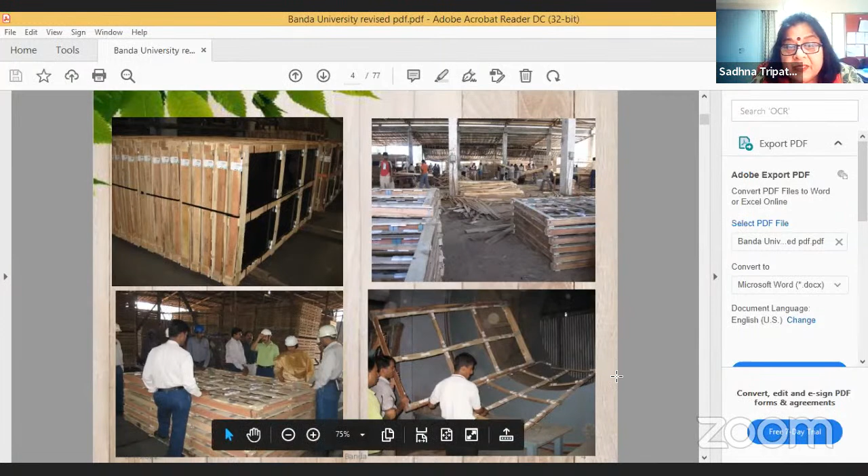And these pallets had different sorts of problems at that time when it was established. A combination of wood was being used, so we tried to resolve the issues, and it was successful. So that sort of consultancy we are imparting in the field. We are in the export industry also, where the goods are being made and they are facing problems. We are regularly in touch with the industry to resolve the issues.

And this is another major industry, which is cooling tower. It is basically used for the petroleum industry. You can see in the petroleum industry, refineries, coal industries, you'll have the cooling towers there. It gives the cooling effect to the assembly. There's a huge consumption of wood in the industry. It's a very cumbersome sort of mechanism to deal with.

And we are also imparting consultancies to very big clients like Reliance, NTPC, Birla, fertilizer companies. There are so many. So we are also dealing with the type of material which is being used. There was a problem in the industry that a combination of wood was being used at that time, and a few imported timbers were also being used. So a lot of collapse was there. When the collapse is there, the production is stopped, and there are huge losses.

So we have been invited for the last 6, 7, 10 years to the industries, and we resolve their issues, and now it is all well. Since you are forestry students, no need to tell you what the structure of the wood is; it is very basic. You can have a look. In the center, you will have a pith, followed by the heartwood and the sapwood and the bark.

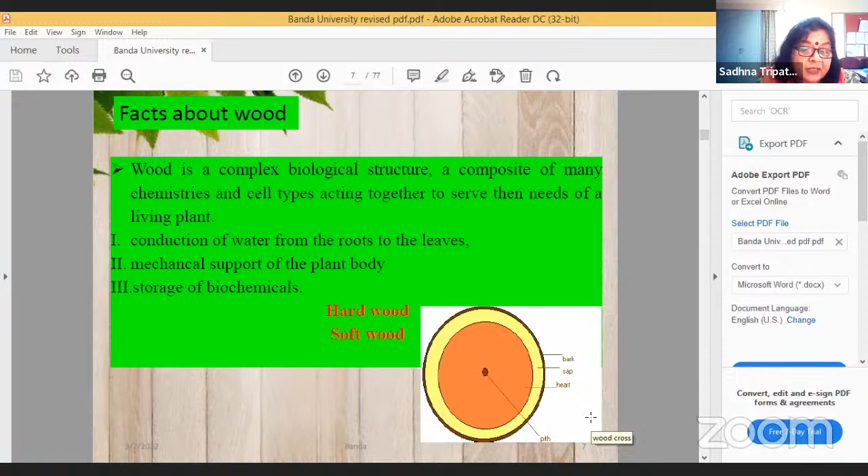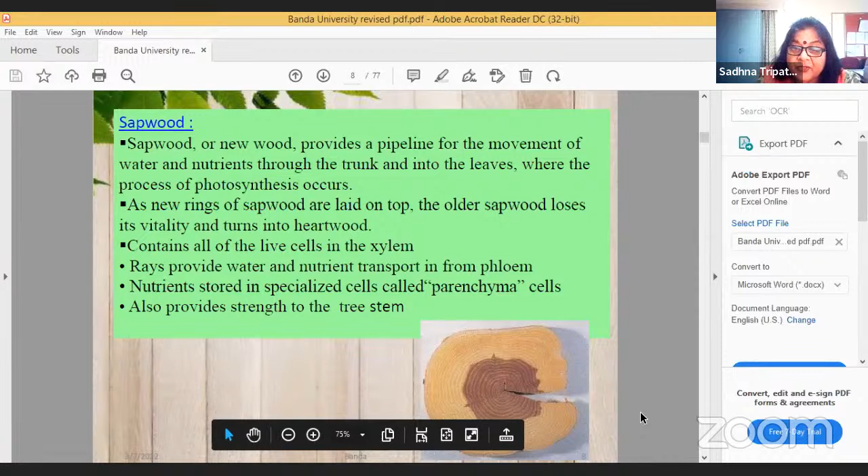So first of all, we have to focus on the cross cut of the log, what is the age of that, what is the expected age of that material. Next, this is all sapwood. Since you are all already at the assistant professor, associate professor level, I need not tell you what this is. You can have the idea of the heartwood, followed by the sapwood and the bark.

Now, a little bit I would like to explain here. The more the heartwood, the more the durability is expected. It is because durability is always related to the heartwood, because all sorts of byproducts, or the secondary metabolites which are produced during the growth of the plant, get accumulated in the heartwood. And most of the byproducts provide durability to the material.

Like alkaloids are there, terpenes are there, terpenoids are there, phenols are there. They are all known for their durability, and they get accumulated in the heartwood. More the heartwood, more the durability. Whereas in the sapwood, there is more of the cellulose part, the carbohydrate, or the sugar containing compounds. So the more the cellulosic part and sugar containing compounds, the more will be the attack on the sapwood.

So now whenever we go for preservation, we focus on the sapwood, because we assume that heartwood is already durable. But in that case also, the durability may differ. It may be of durability class 1, 2, 3, and so on. You can refer to Bureau of Indian Standard 401. Just go through that. You'll find that different durability classes are there. These durability classes are made on the durability of the heartwood only.

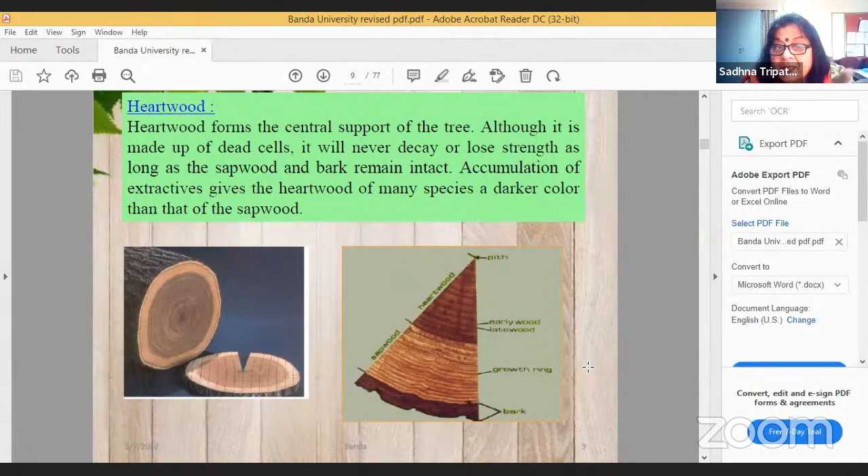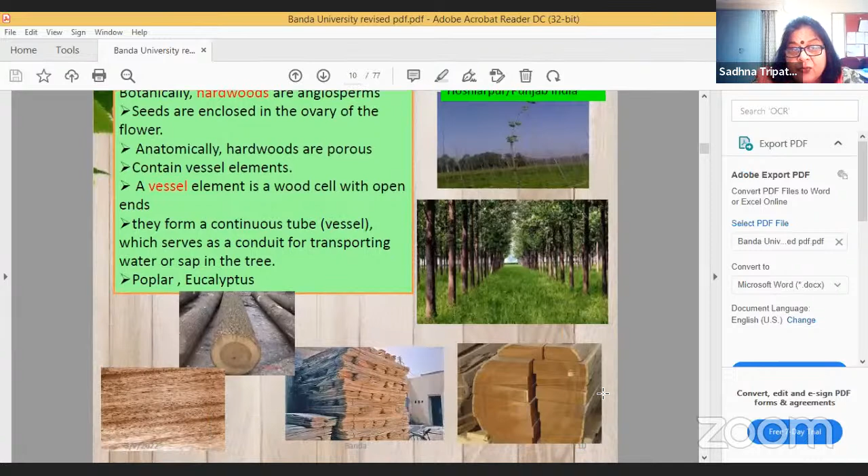And we gradually take observations up to 10 years. If nothing happens to that material, then it comes into durability class 1. I'll explain further. But by and large, if it is not attacked for 10 years, then it is durable. You must have the idea of the hardwood, why it is hardwood, what is softwood. Here the pines all come in the softwoods.

And what is natural durability? As the term indicates, it is the durability naturally present in any material. How is it there? Because of the extractives. As I have told, these are the secondary metabolites produced in the plant, and many of them have protective power. They provide protection to the material. So it is termed natural durability. It varies with age and height, and from tree to tree.

And now this is the durability class which I was just explaining: if the material gives a service life in exterior ground contact of 10 years or over, then it is durable. Need not worry about that. No treatment is required. Majorly, the species are sal, teak, shisham, etc.

But as we move to the lower classes, if we put the material in the ground and get a life between 60 to 120 months, it comes into moderately durable; 55 species were so far evaluated, now the number has increased. If it vanishes within 60 months, it comes under non-durable. If we have material in the lower two classes, we have to do the preservation. There is no option. But if we have durable species, nothing to worry. What happens is, we straightforwardly say that yes, this is teak, it will be durable.

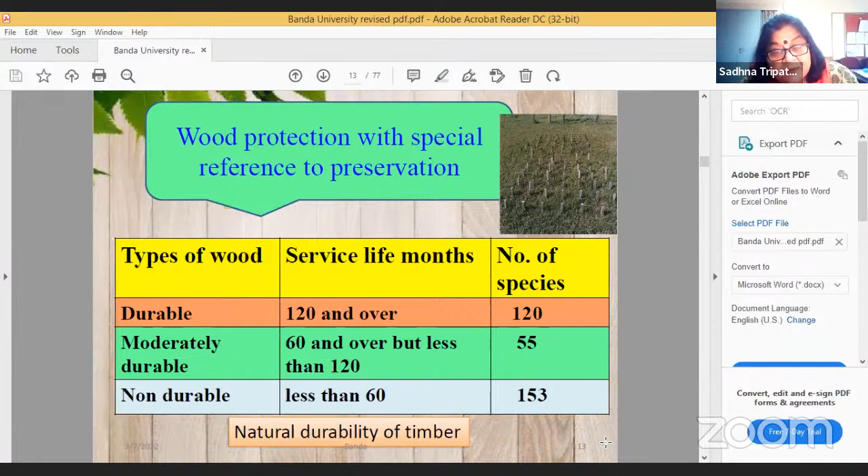What is preservation? Preservation is an efficient tool to prevent biological attack on the wood. As I've said, we have two larger portions: one is sapwood, one is heartwood. Heartwood has different durability classes, but sapwood is always non-durable. So if the material has a larger quantity of sapwood, you have to do the preservation.

Sometimes people ask how to segregate the material when we have 50-50 heartwood and sapwood. How to convert the material is a big task. If you convert the material as a whole into planks, when you go for treatment you won't be able to treat the heartwood, only the sapwood. But the plant manager will ask for the whole money; for the volume he will charge double, and you are paying for that.

So you have to be a little bit aware and have some technology for how to segregate the material. You have to cut your planks so that you get the maximum quantity of sapwood and both woods are separated properly. That sort of technique needs to be developed. Since you are from the forestry and wood science and technology background, you have a lot of knowledge in the field.

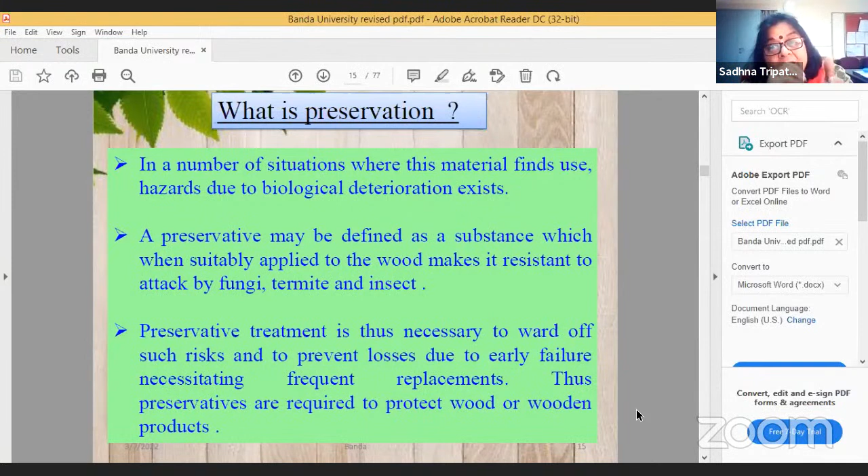And it has a sort of binding material. It has a tendency to bind with the cellulosic part, so it is there for a longer duration. What we do is that we take the material and, by some mechanism, we impregnate the material with the toxic element, and it is there. When you introduce some toxic material in any material, it will be durable. It will provide the protection.

Now, what are the basic agencies which are responsible for decay? These are biological degradation. Fungi are there, then insects are there. We deal with the fungus and the insects. They are the type white rot, brown rot. You have to worry about both the rotters, because they basically decay the wood. They affect the strength of the wood.

Whereas the sap stain causes the stain on the wood, which deteriorates the quality of the material, the looks of the material. Soft rot, again, affects the strength. But white and brown rot are the major players which exist in the normal environment, whereas soft rot exists in the humid environment, basically in humid areas, or in the cooling towers and all. But white rot, brown rot, you can get it in your houses, you can get it in exterior conditions

in your yards and all. And the termites are very dangerous, and there are many types. We are not focusing on that, but basically they are also responsible. First the attack takes place by the rotters. They form a spongy type of material. After that, the termite enters into the galleries and consumes the rest of the material. So it is all gone, and on the surface you won't be able to see that it is damaged. But inside, everything is gone.

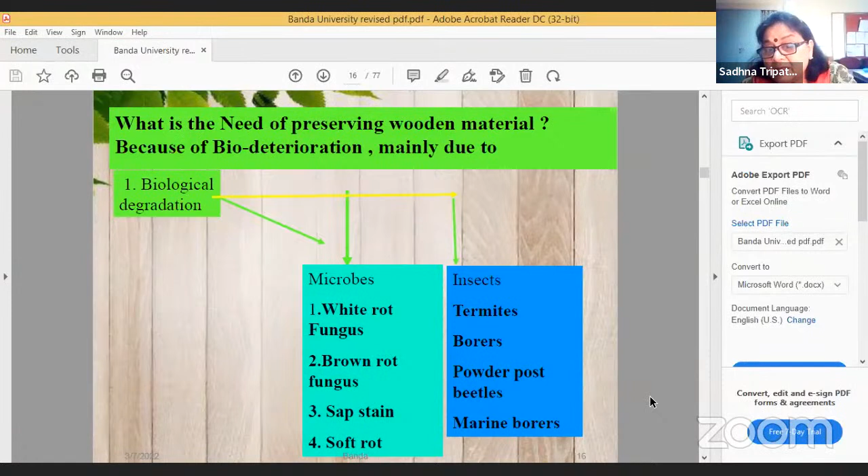But if you have gone for the preservation, what would happen? Since it is a toxic material, it will just kill the borers there itself. So if the material has the borers and you have properly treated the material, you won't get any sort of defects further. Now other effects, which are physical, chemical, mechanical, and fire. I am not dealing with the others except the fire one.

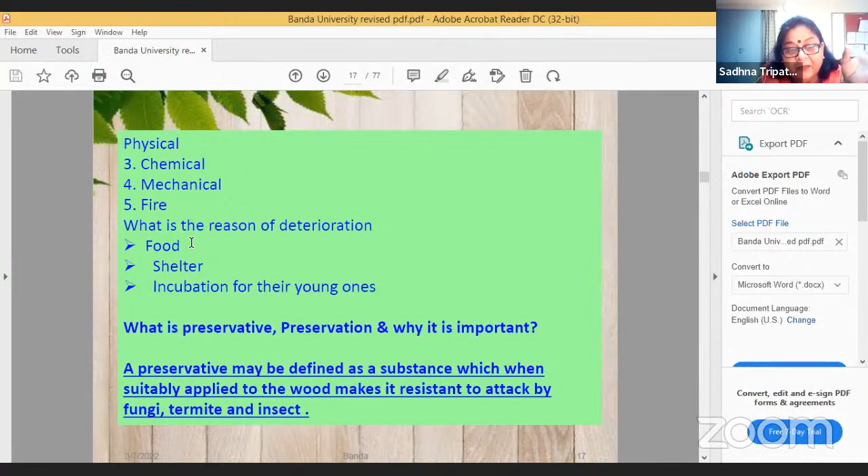So what is the reason for the deterioration? Very simple: food, shelter, and incubation for their young ones. Food is the basic requirement of any decaying agency, be it fungus or termite, along with shelter and incubation. And a preservative is defined as a combination of toxic materials which, when suitably applied in a suitable quantity in a suitable material, gives protection. That is the simple thing. What is suitable, I will explain further.

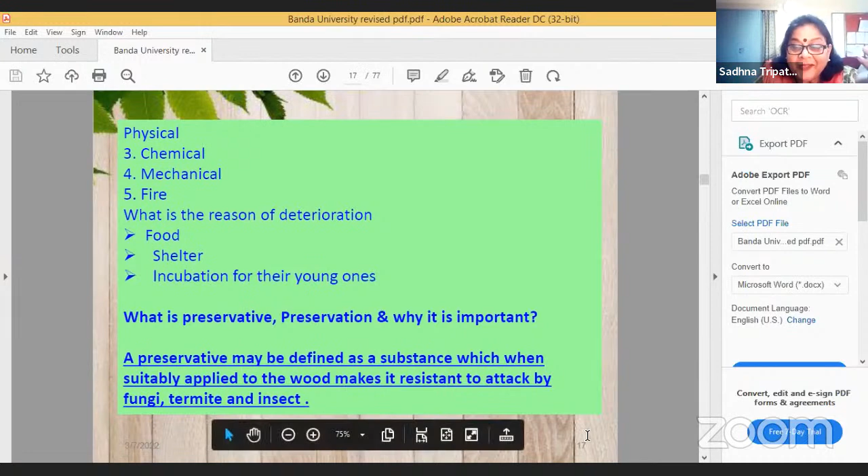10 kg per cubic meter is the maximum quantity required for protection of wood. For simple calculation, you multiply 150 with 10 kg, that gives 1,500 a cubic meter - that's the investment only. Apart from that, the vessel has to run for 2.5 hours, so with electricity and manpower it comes around 3,000 rupees per cubic meter.

A cubic meter is a large volume of timber. So you are investing 3,000 rupees in a cubic meter of material, and you are getting several fold life of that material. That is a simple calculation here.

If you see that the mine has untreated material, mine props have a life of 2 years - you might have heard about this. But if you treat the material, you get 10 years of life, so simply the life increases 5 times. When using material in open ground, 5 years becomes 25 years.

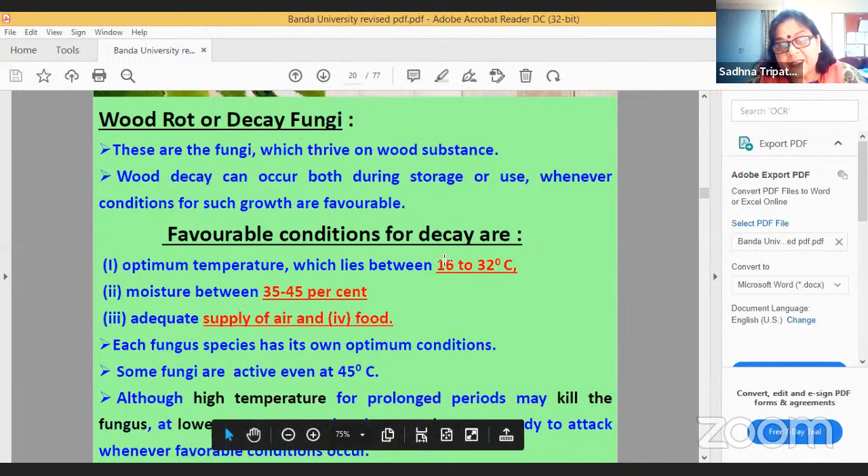The favorable conditions for decay are 16 to 32 degrees centigrade, 35 to 45% moisture, and supply of air and food. If these conditions are there, certainly there will be attack.

You might have seen this sort of thing, white rot fungus, where cellulose, hemicellulose, and lignin are all attacked. That means all the integrity of the material is lost. So white rot is very, very damaging.

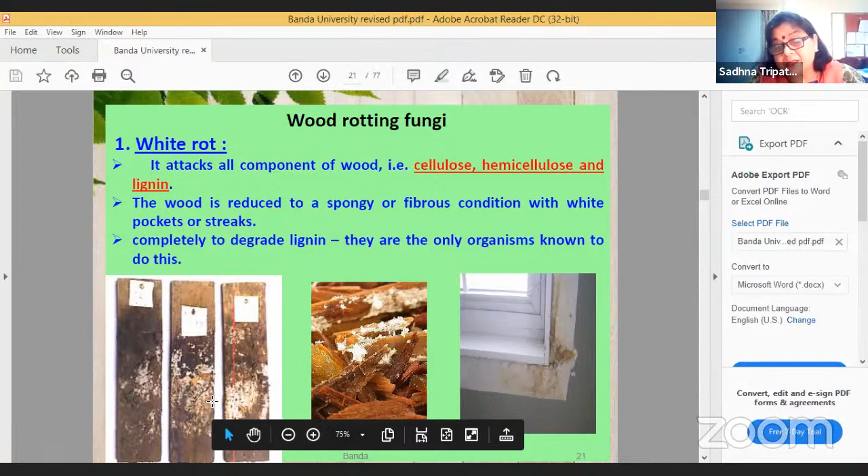Whenever you see that the material has a cottony white growth, you segregate the material immediately, because this fungus grows very fast. Similarly, you might have seen the cuboidal sort of thing.

It is brown rot, and these rotters primarily consume carbohydrates. Lignin is not much affected, so in this case the lignin is left as such, and the material becomes brown in color.

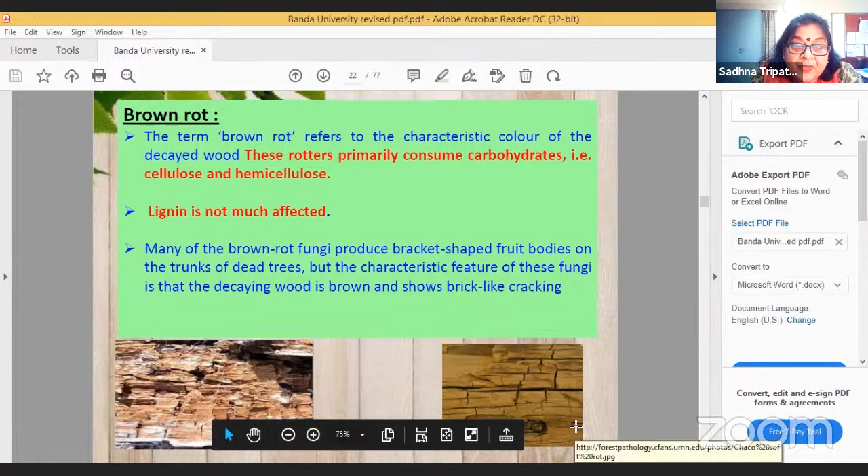It also affects the material. This is soft rot. I have already told that in the cooling tower, you'll be able to find decay marks on the material - that is soft rot. It is very, very aggressive, as soon as it infests the material, all the material becomes spongy and loses all its strength.

So what is the method? First is just to keep the wood dry, coat wood with things like borax, boric acid, sodium pentachlorophenate to poison the wood, using natural and artificial methods. We'll discuss this further.

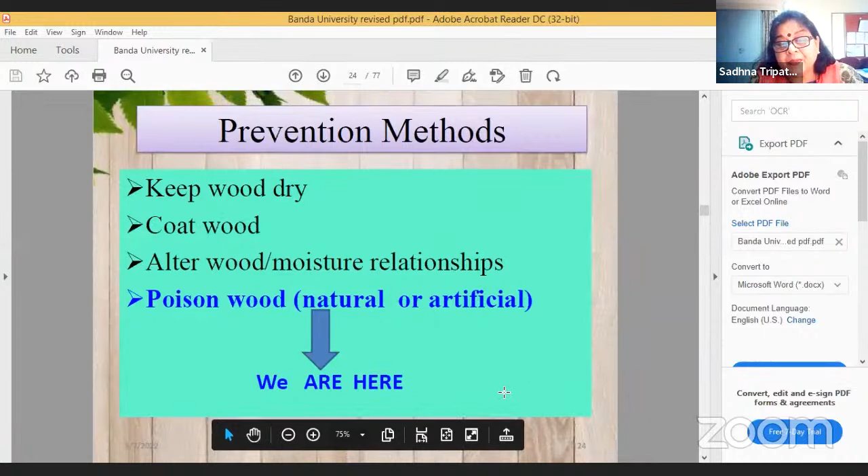So it starts with non-felling - if the fell timber is there, we have non-chemical methods and chemical methods. There are two types of methods.

First is, what happens if we cut the timber in the winter season, what would happen? May I have interaction with the audience also?

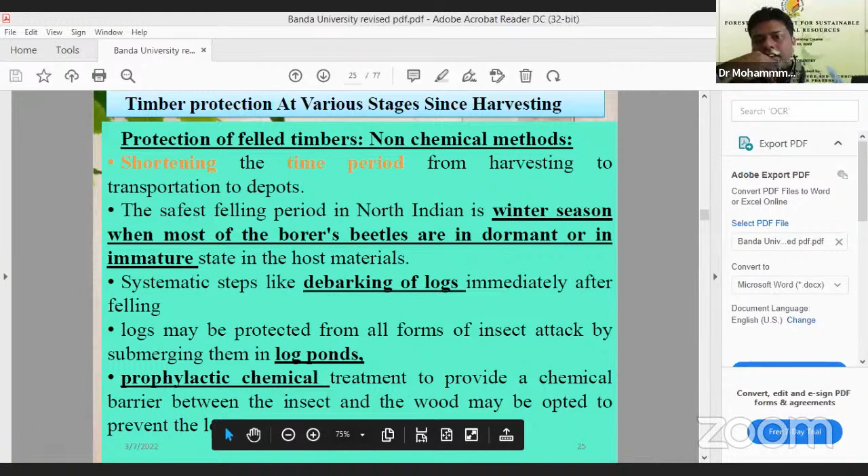One more question I think I should ask here, and then we can move ahead. What is exactly found in the indigenous teak that makes it durable? Indigenous thing, what I have seen, like in neem oil - every natural material has a different entity. Like in neem oil, hundreds of compounds are there.

He has asked about teak, ma'am. What is exactly found in the indigenous teak? He has asked about lantana. No, actually in the personal message he sent a DM. His question is, in teak, tectoquinone is present, and that is a ketone. Tectoquinone, okay, yeah, tectoquinone is there. It is in the literature also.

And that's a ketone which provides protection - there are 3-4 compounds. Majorly there are 3-4 terpenes, terpenoids, alkaloids, phenols, sulfur compounds. They majorly play a part in protection.

So when we are going for timber felling, we have to take care. If we can manage it in the winter season, then it is good, because all the physiological activities are at the lower side. So it is in the dormant state - winter season, when most of the borer beetles are in the dormant or immature state, then you can plan felling.

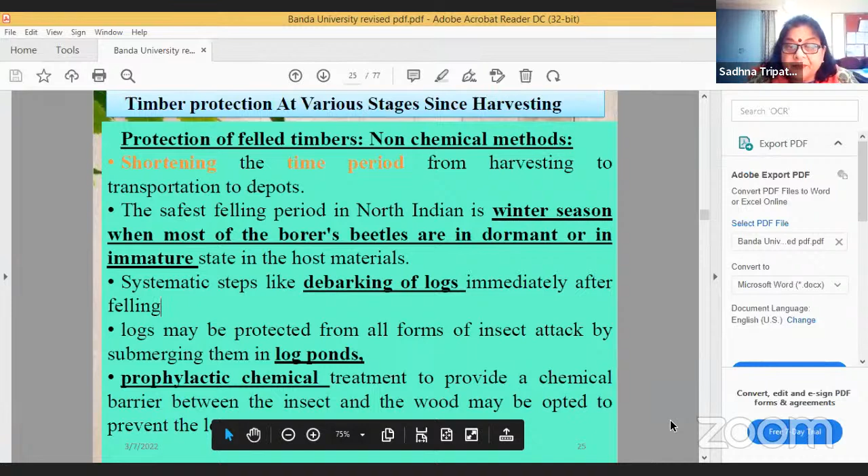Now, protection against end cracking. You might have seen that when logs are there, after some time cracks appear on the ends of the logs. What happens is that there is uneven removal of moisture - from the ends it is very fast removal of moisture, but from the upper surface of the log there is a slow removal. Yes, Dr. Amarjeet Singh, unmute yourself.

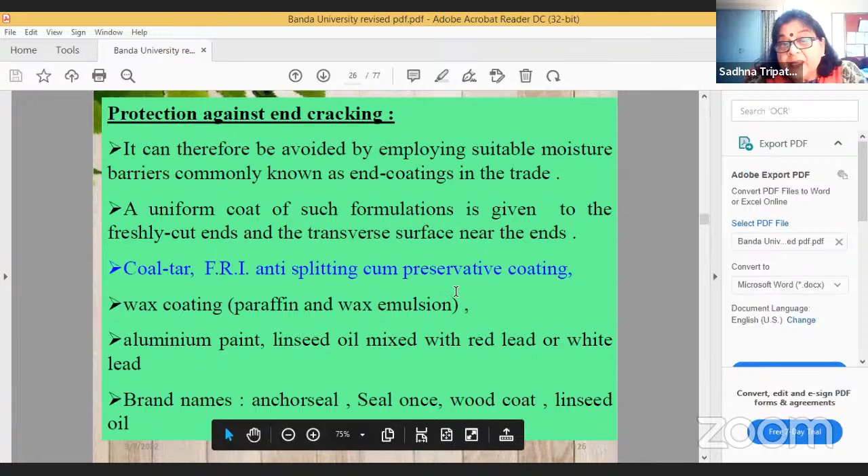So you can see the uneven drying will result in end cracking of the logs. So prophylactic treatment I have already explained. When you have converted the material, but you are not able to use it further for processing, if the kiln is not available, or your material is not properly dried, or some sort of problem is there, all these materials are available in the market.

You can have anyone. I prefer the borax boric acid, sodium pentachlorophenate, 2.5% solution. Spray it, apply the crosses, stack it there for 3 months. Need not worry. This is called prophylactic. Prophylactic means initial remedial treatment. So now there are two different types of protection also, like short-term protection during transportation and storage, and then long-term protection.

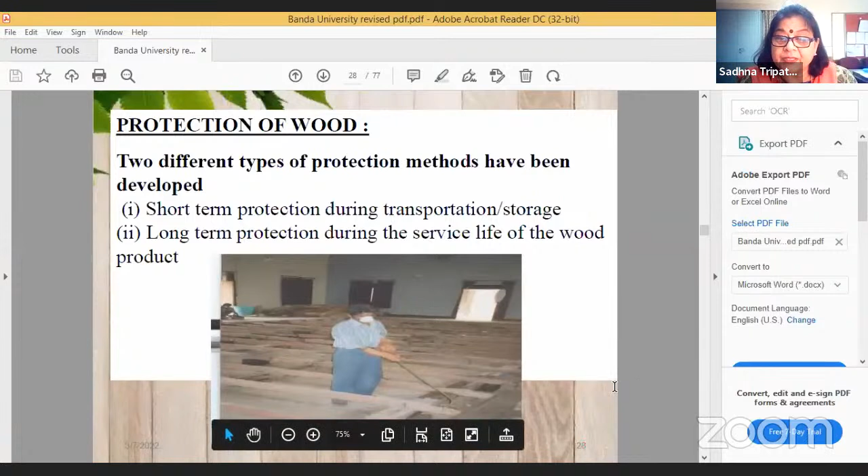These are the chemicals which are basically being used in the industry. One is oil type, then the organic solvent type, and the waterborne type. We'll come to the oil type preservative. This is called creosote coal tar fuel oil. It is a byproduct of the coal industry, which is very, very cheap. It is available in Ascu, Hickson, Calcutta. They are providing it in drums. Earlier, it was 11 rupees a liter. Now it may be 30 or 35 rupees.

And the fuel oil, you can get it from the oil refineries. 50-50 solution is there. Cold and hot treatment is given, and the wood material lasts for more than 100 years, what we have seen. In FRI, we have the building of the FRI here, where the roof is made of pine shingles. These pine shingles are treated with the same procedure along with the CCA. So for more than 100 years, it is there. So now you can imagine how useful it is.

It is being used for catamarans, for ships and all. And in the yards also you can use it. And it's very easy also. For your own purposes also, if you are making your house, you can get the residue from the petrol pump. You take the residue, dissolve it in kerosene and just spray on the soil. And after that, you build the house. It's my personal experience. There will not be any termite infestation from the plinth. So that is how effective it is.

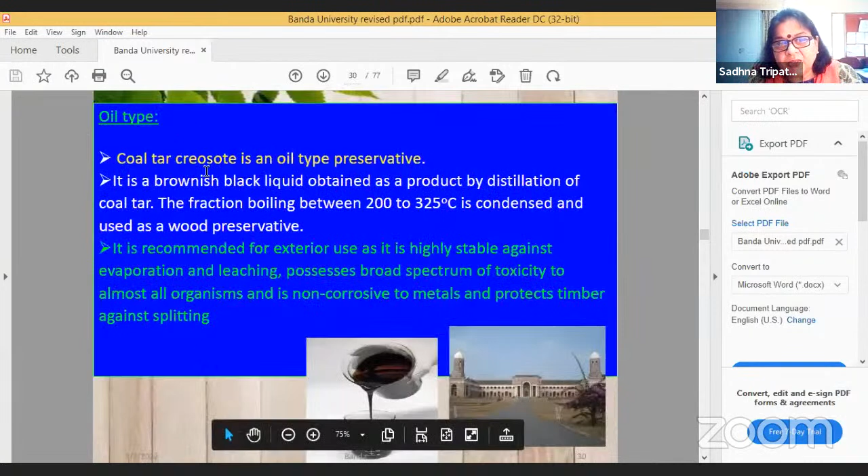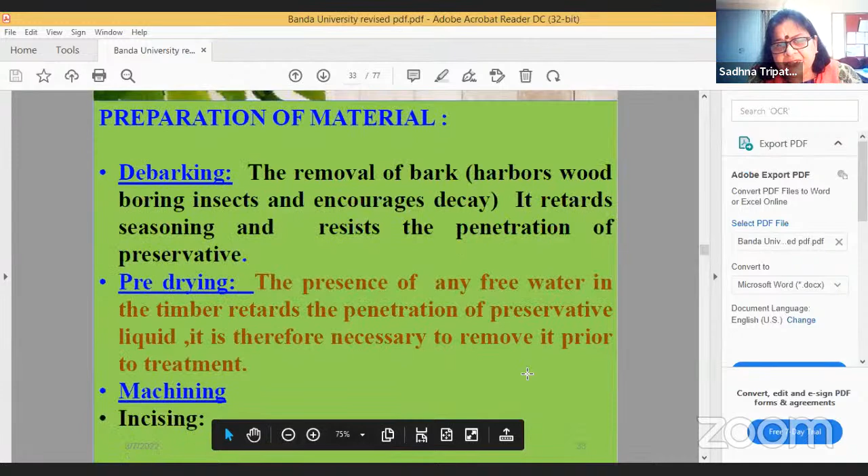Now, this is coal tar. I have already told, this is a byproduct of the coal industry. Fixed type, I have already explained. These are the conventional type, CCA, CCB. These are the steps: debarking, pre-drying, machining. These are the processes. Then I would go for the long-term preservation. Long-term preservation, this is debarking. Then we put the material in, and different types of machines are there. There is a hot and cold process, which is suitable for the coal tar sort of treatments.

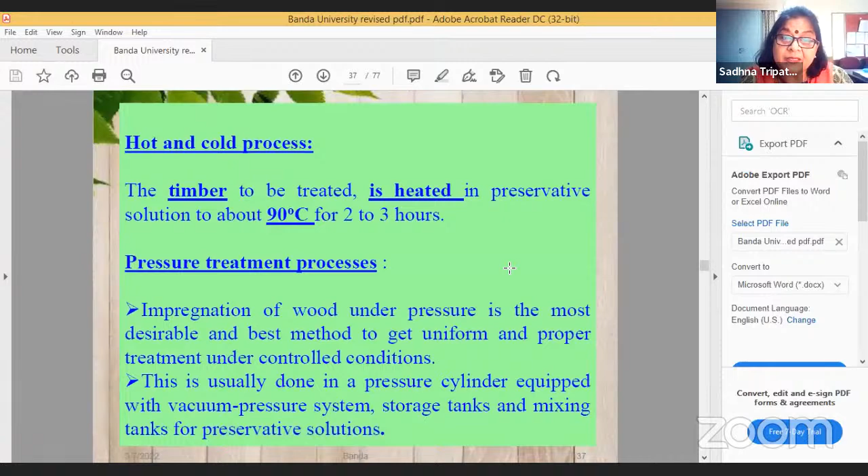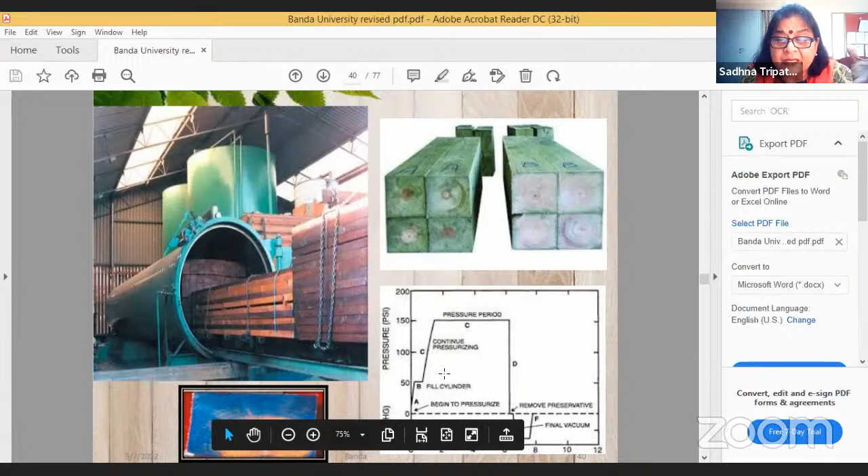Then the pressure treatment processes. In case of the pressure treatment process, we have different techniques. Now you can see that we season the material, we stack it properly, and these are the treatment vessels. These are the tanks where the preservative is stored. We introduce the material, we close the lid, and then a small vacuum is given. On the graph, you can see a small vacuum is given. The free air that is there will be removed, and there is a vacuum in the cylinder.

With this, the pressure is given, and with the pressure, the liquid is flooded in the vessel, and this pressure is maintained for a certain period. The pressure amount and the duration depend on the type of the material. Like what? If you take chir, Pinus roxburghii, or any soft species, not imported. Imported are very complicated. Indigenous softwood, if you take it, a small pressure has to be given. The maximum is 10 kg per centimeter square, and the minimum is 3. So 3 kg is enough. For half an hour, pressure is maintained.

But if you have eucalyptus, then vacuum, then high pressure, and the pressure has to be maintained for a longer period, then leave the material in the vessel along with the preservative. So that sort of technologies you have to develop. It varies with the wood material. If the wood is easy to treat, then an easy method is applied. Otherwise, you have to devise the method, but the basic crux of the treatment is this: a small vacuum, then pressure, then vacuum.

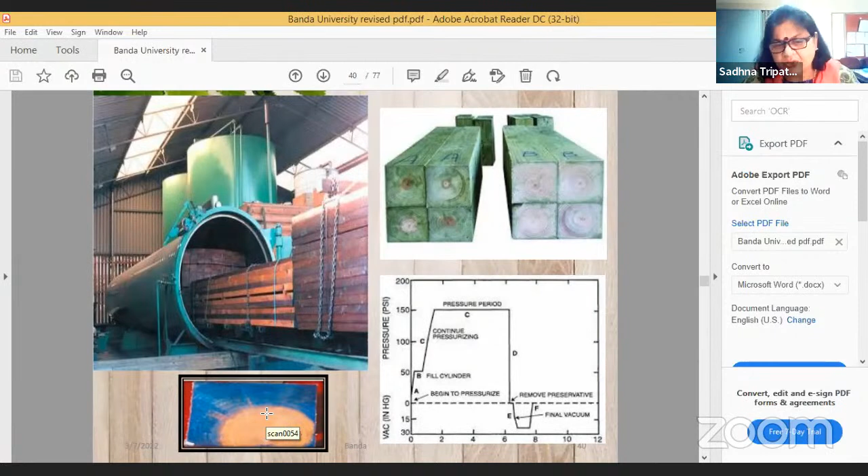If the material is untreated, what would happen? You will get this. You can see that this material is completely treated, whereas this is untreated. So it will cause the failure of the wood in the system or wherever you have installed it. So we have to avoid this. Through and through treatment is required for any end use.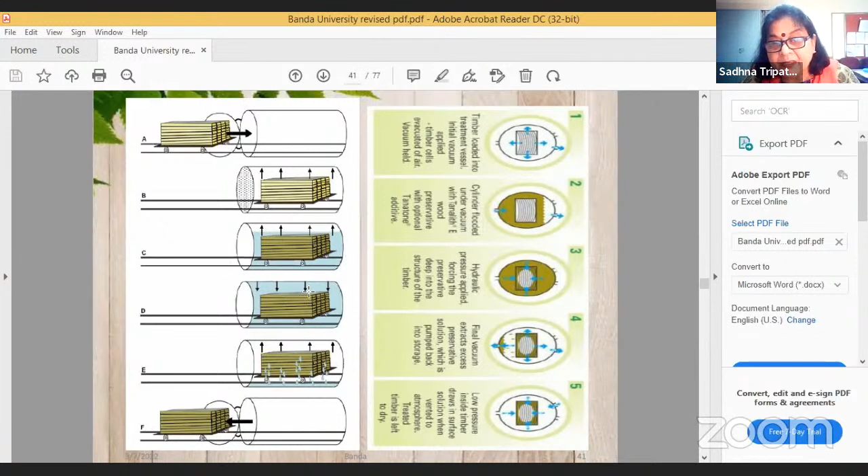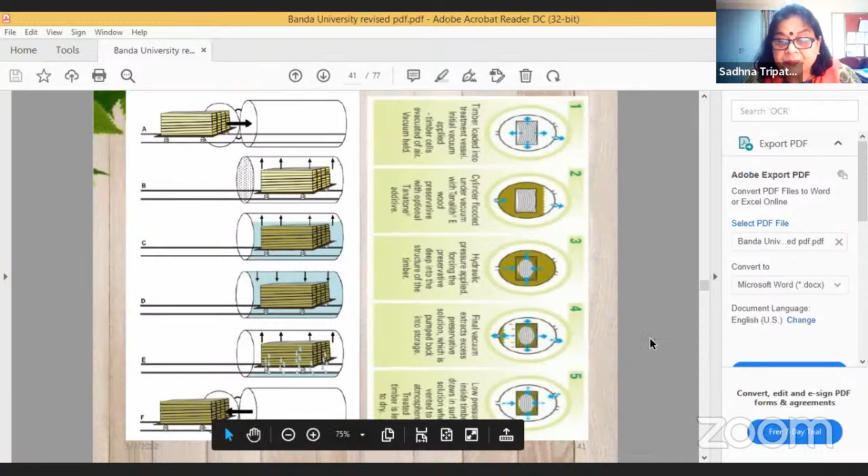This is a simple representation. Material is in the vessel. A small vacuum is given. Then the machine is flooded with the preservative. Then pressure is given. The material is treated for a certain period. And then a small vacuum is given, and then the material is out. So that is the simple technique. Very simple. This is the graphical representation.

We observe these samples for 2 consecutive years. In the first year, we place it in May, remove it in November, and study. Then again in the next season, we place it in May, remove it in November, and we study. This certain concentration is there for plywood also, and for solid wood the same method is there; it is all published. So only if the material performs like that do we say that yes, this preservative at this concentration is working on the plywood or on the solid wood.

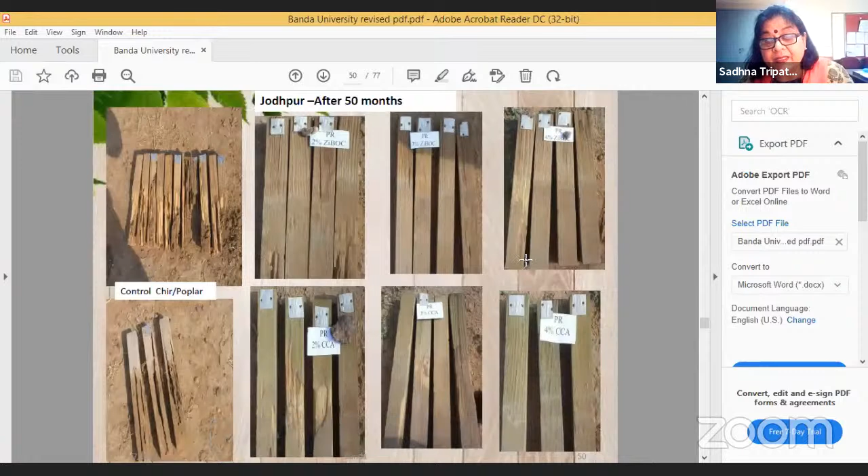We have different test yards. One is in Dehradun, one is in Chakrata, one is in Jodhpur. So by and large all climatic conditions are covered. We take the observations simultaneously at 3 centers, and on a cumulative basis we give the result that yes, this wood and this preservative is working. This is a yard. This is imported timber. This is chir and poplar.

You can see the outdoor testing is now already in the standard. Earlier it was not there in our standard, but we have now standardized it. Now you can see this is imported timber. You see the infestation at Jodhpur. How aggressive is the termite? The whole of the wood is covered with termite soil. This is yellow Meranti, which is imported timber, Shorea group of species.

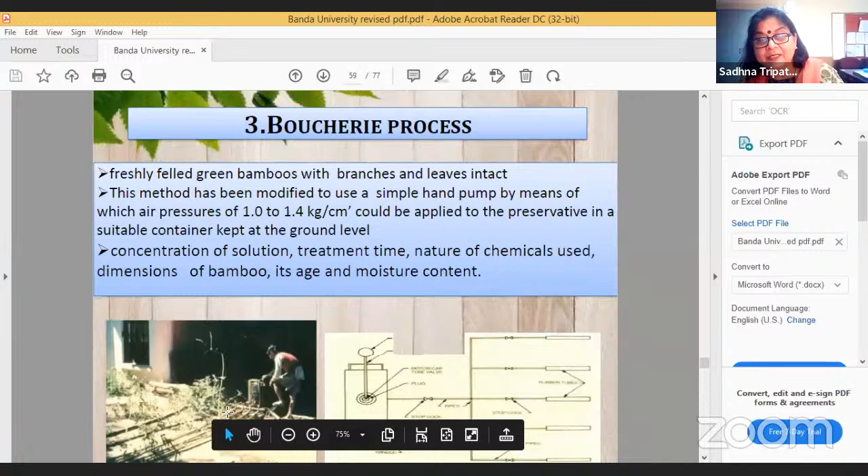And similarly, we deal with bamboo also. I think we are short on time for how to stack the bamboo. Quickly going to the methods, this is Boucherie, which is quite common for green bamboos. The whole bamboo is attached. Then this is a treatment tank, a small pressure is given, and it starts draining from the other end, and it takes 6 to 12 hours to treat the bamboo. You just leave the bamboo, monitor how much pressure is there, and that is all. It's a very, very efficient method. Then this is how it works.

And another is the dipping. This is a very, very efficient diffusion method. If you don't have any assembly, you just have the preservative, make a water solution of 4% or 6%, dip the bamboo or the wood, even wood also, for both the material it goes well. And you dip it there for 7 days. After that, you take out the material, leave it for 15 days and use it. It will be a very, very efficient and very cost-effective method.

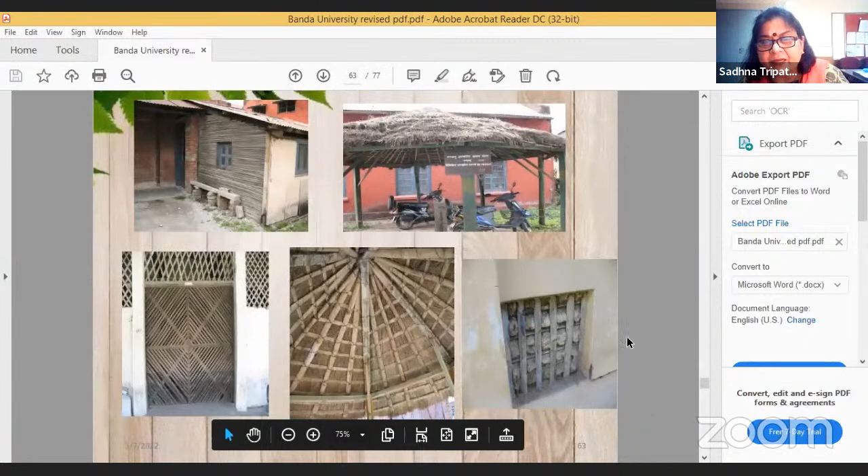We have made these assemblies here. These are the structures which were made in 1957, 1967, like all. And this is a hut which we made in 2008, how the bamboo jafri was made. And the new preservative ZiBOC was tested in 2008. This structure is being tested since 2008. We can treat the thatch also, which is a grass, with the fire retardant and the preservative, both are there.

We have made the floor. This soil is full of termites in FRI Dehradun, and we have made the treated material there in 2008, and still it is there. You can see the things. Here the soil we took, and we have made it water resistant with the thatch. And this is the hut which we have made in 2008. These are the other structures.

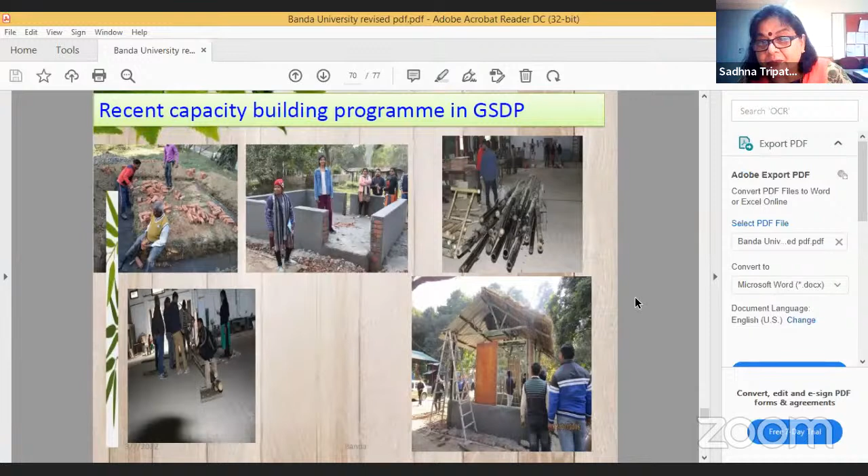This is a training under the green skill development program from Government of India for 2.5 months, and they have made the structures. This is another demonstration structure where the thatch is being compared with a GI sheet. Some are treated, some are untreated. We have a common facility center here also. That's all. Thank you very much.

Thank you very much, ma'am. It was really a very, very nice lecture, ma'am. It was not a lecture actually. It was a lifetime experience you have shared with us, and I think all the participants would have really benefited from it.

And the bamboo shed house you were discussing has been developed in 2008. It has been developed before our eyes. I have seen it when it was getting developed next to the wood preservation lab.

Actually, I just want to share one thing. You said that after the treatment, the service life of the wood increases more than 5 to 10 times. But people are still not adopting it, and the industry is also not willing to adopt it. The main reason, I think, is they find this wood still very cheap. They think it is better to use this wood without having a second thought. They don't even bother to treat it to increase the service life of the wood. They find wood a very cheap material. That is why they are doing so.